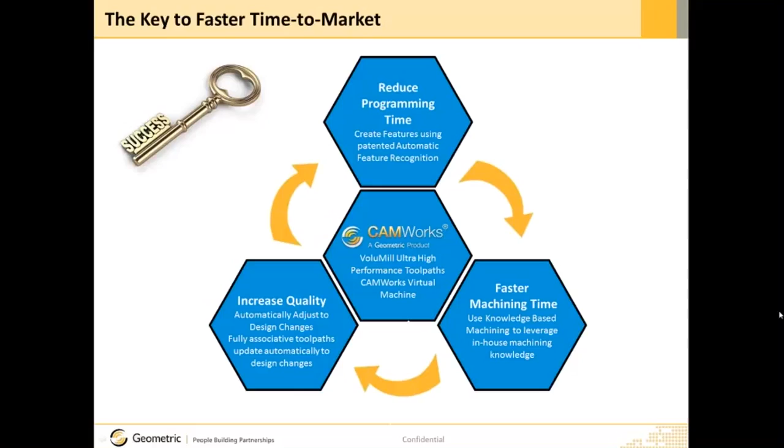So I'm often asked why CamWorks, what's so great about CamWorks? The first thing is that you can reduce your programming time by up to 90%. And you can have faster machining and cycle times by up to 80%. You can cut your setup times in half and improve the safety of your CNC machines. And improve the quality and consistency of the parts that are being manufactured. You can also use CamWorks to automate and customize your system.

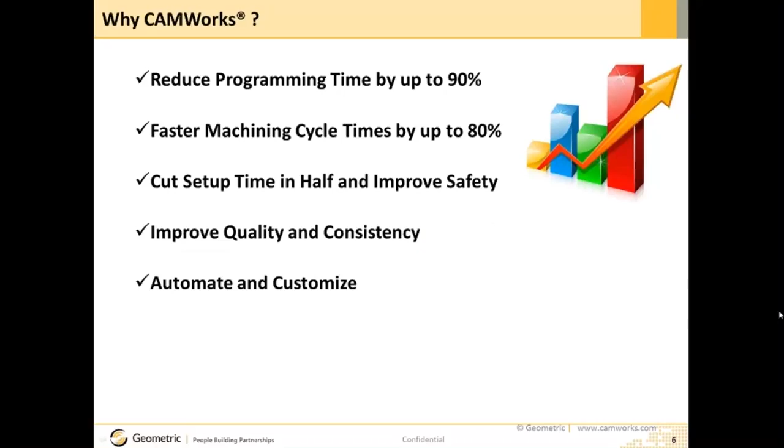So let's look at the first thing here: reduce programming time by up to 90%, and how CamWorks is able to do that. It uses feature-based machining, first of all, and feature-based machining is critical to reducing the programming time.

Similar to parametric feature-based mechanical design and what feature-based mechanical design did for design engineers, CamWorks feature-based machining does that for CNC programming.

It's seamlessly integrated, so it's right inside SolidWorks or Solid Edge and runs directly inside the interface. It's also CAD independent in that it can take even imported models and treat them exactly the same way as it would native SolidWorks or Solid Edge files.

It uses automatic feature recognition to automatically recognize machinable features on the part. And it uses knowledge-based machining in order to generate operations automatically and choose the correct feeds and speeds, cycles, depth of cuts, and so on for the machining.

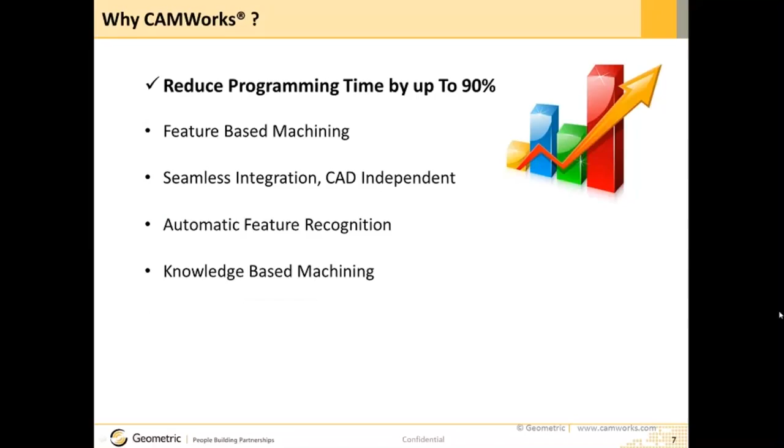Feature-based machining is important because it creates true 3D machinable features, not chains or profiles the way traditional CAM systems work.

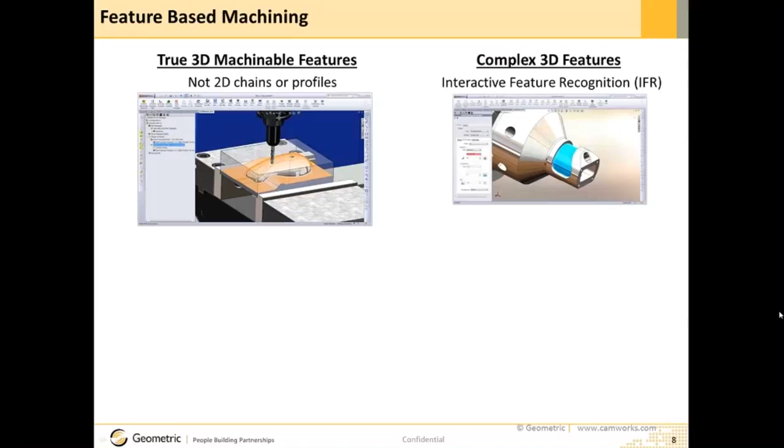And you can also create complex 3D features, wrapped features like the ones you see there, but also 3D or 3-axis surfaces, faces, and so on. CamWorks uses a feature tree, very similar to SolidWorks or other CAD systems.

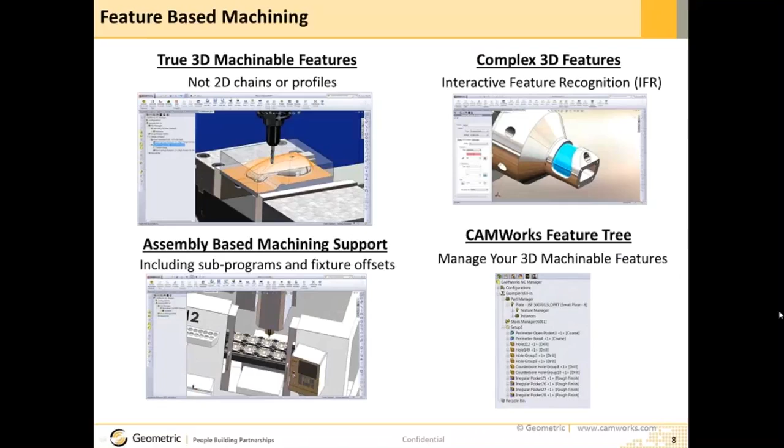It also has assembly-based machining support, so you can create a full assembly of multiple part fixtures, and you can check for collision avoidance and so on using CamWorks assembly-based machining.

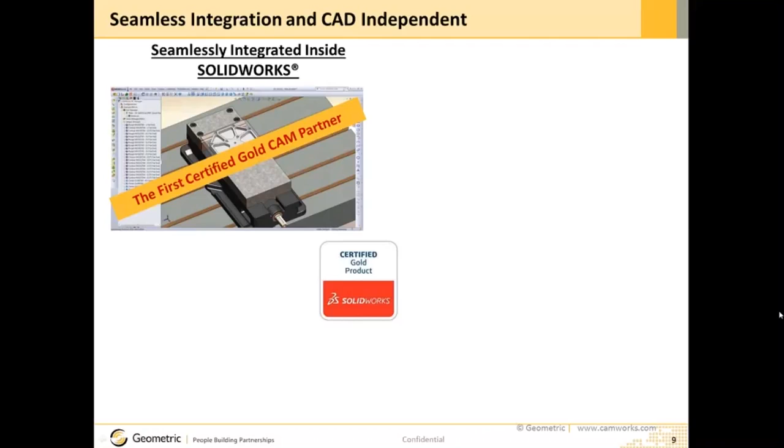It's seamlessly integrated inside the CAD system, running right inside SolidWorks, and all of the CAM data developed from using CamWorks is stored directly in the SolidWorks part or assembly file. CAMWorks was the first certified gold CAM partner of SOLIDWORKS.

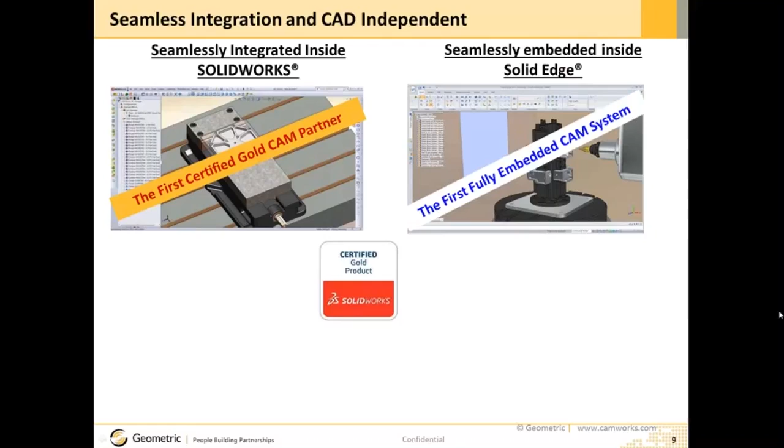Similarly, it's seamlessly embedded inside Solid Edge. CAMWorks was the first fully embedded CAM system inside Solid Edge, so you can program your parts directly inside Solid Edge without ever having to leave the Solid Edge environment.

I mentioned that it's also CAD independent, so it can take files from various CAD systems, and an imported file, whether inside SOLIDWORKS or Solid Edge, is treated exactly the same way by CAMWorks as a native file. It can take files from a number of other CAD systems as well, and it has industry standard support for STEP, ACIS, Parasolid files, and so on.

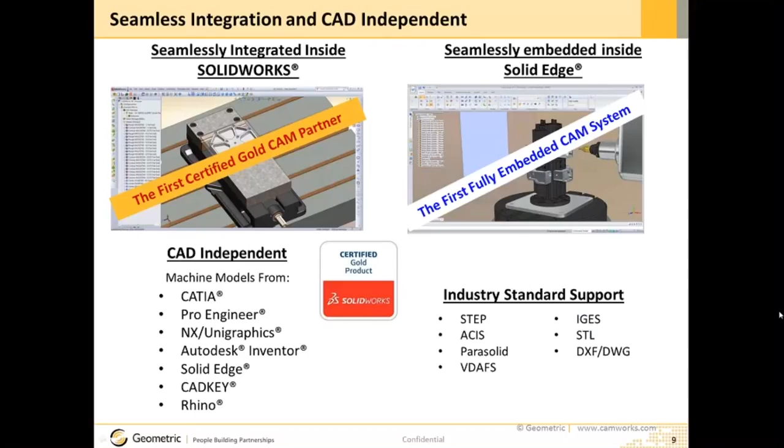CAMWorks uses automatic feature recognition. It's fully automatic, and it'll recognize over 20 different types of machinable features. This is much more robust than most feature recognition, not just for holes or pockets. It'll find slots, bosses, and a myriad of other machinable features on the part.

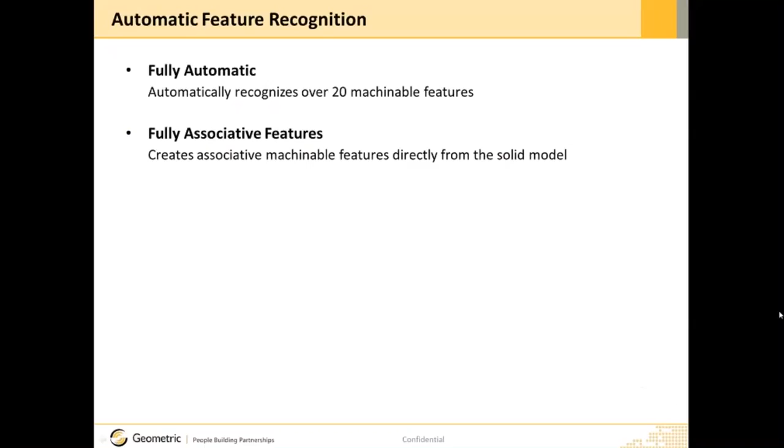It creates fully associative features, so these machinable features are fully associated with the model. It allows the design model and the manufacturing model to become one and the same, so the toolpaths will update automatically with changes made to the design file.

And it creates machinable features that are independent of the features used to create the CAD model. This is important because the features used to create the CAD model are not always the ones that need to be machined.

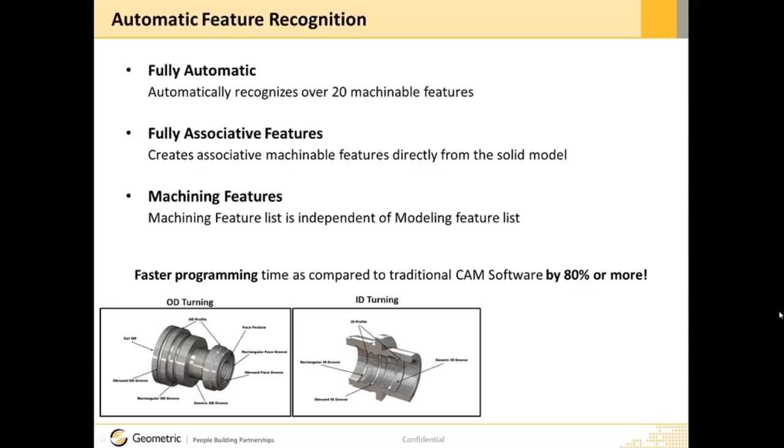And it ends up allowing you to have faster programming time as compared to traditional systems by 80% or more. You can see here it supports OD turning, ID turning, and CNC milling features as well, so it can find all the different types of features identified there.

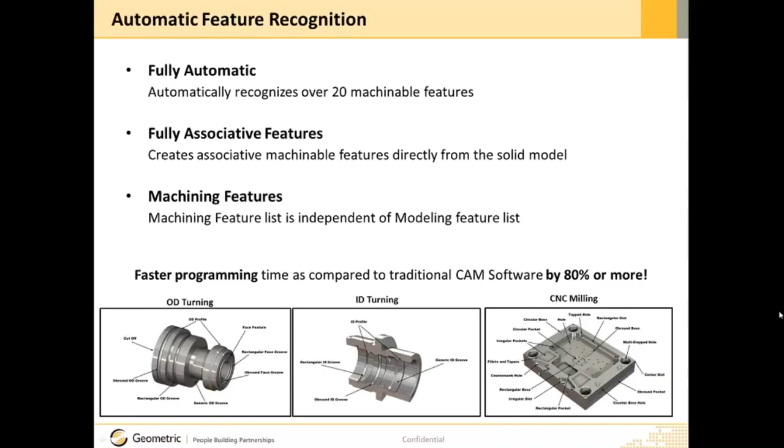CAMWorks also uses knowledge-based machining, and it uses the patented technology database in order to generate operations and create toolpaths.

Using the technology database, you can capture and reuse your best practices, which improves efficiency and plant-wide consistency. This means all the programs are going to be generated the same way for the different types of features being machined.

And it's fully customizable, so you can capture the best practices of your best programmers and machinists and store them inside the database, so those techniques, machining strategies, tools, and feeds and speeds are used automatically when CAMWorks sees a particular feature in a particular type of material.

And this eliminates repetition through standardization, so you do it once and you can use it again and again and again. This is the most advanced knowledge-based machining technology available. Inside the technology database, we can define machines, materials, feeds and speeds, tooling, and so on.

So let's now take a look at the product and how it works.

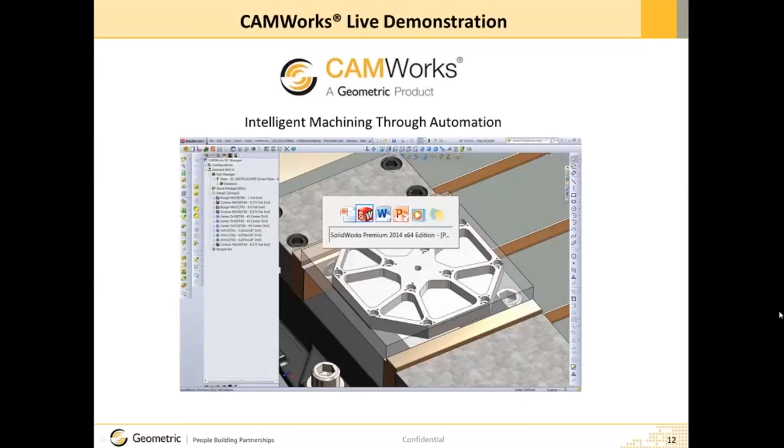So here's a part that I have inside SOLIDWORKS. This happens to be a native SOLIDWORKS file, and you can see the tree over here, the SOLIDWORKS feature tree. This could just as easily be an imported part as well.

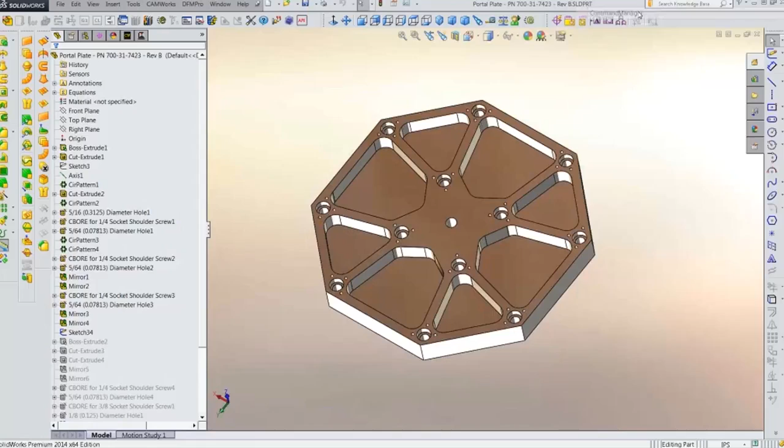CAMWorks is an add-in to SOLIDWORKS, so once it's been installed, we end up with a CAMWorks menu. We also have a CAMWorks toolbar that gets added, and in addition there's the CAMWorks command managers, a couple that we add to the interface. Those are great for when you're first learning and getting used to the system. We also add a couple of tabs to the SOLIDWORKS property manager: one for CAMWorks features and one for CAMWorks operations.

So I'm going to take this part and begin by using automatic feature recognition to automatically recognize the machinable features on this part.

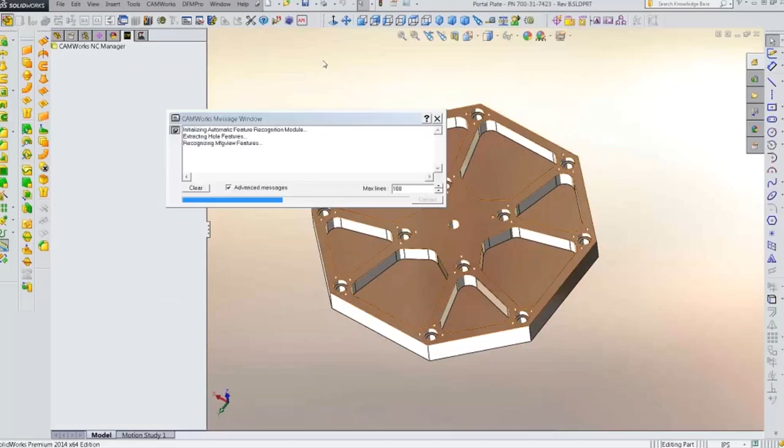And now the system is looking at the model and extracting the machinable features, identifying those features that can be machined on this part.

It automatically added them to the CAMWorks feature tree. So you can see here, it found the outside of the part perimeter. It also found the hole in the center here because it's a different size than the other holes in the part. It also found this group of small holes as well, and because all those holes are the same size, it automatically grouped them together so that I don't have to individually go around and pick all these holes.

Likewise, it also created a group of these counterbore holes. And you can also see here that it identified the pockets in the part as well.

Now that it's identified the features in the part, the machinable features, I can go ahead and use knowledge-based machining to generate the operation plan for machining these features automatically. So I'll go ahead and do that.

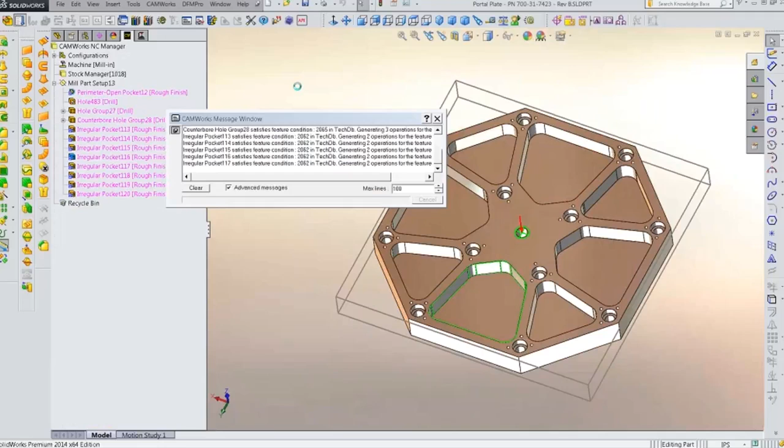And now it's using the technology database to choose the operations, tools, feeds and speeds, and so on for machining of this part. These are feeds and speeds, strategies, and tools that I've stored previously into the technology database. It comes with a standard set of tools and strategies assigned, but I've also customized it a little bit for my purposes, for my preferred method of machining.

And you can see here it automatically generated all these operations for machining of the part. Each of these operations is an individual operation for the machining.

And I can drag and drop these into a particular order. This is going to be processed from top to bottom, this list, and so that's the sequence of machining that's going to occur. Sequence of machining is always important.

So what I want to do here is sort these. For example, I could drag and drop these into a particular order if I want them in an exact order, or I could also go ahead and sort them.

So what I'll do in this case is use the sort operations function. I can use this list here to drag and drop the operations into the desired order. For example, what I might want to do is do all the rough milling and all the finish milling before all the center drilling and drilling.

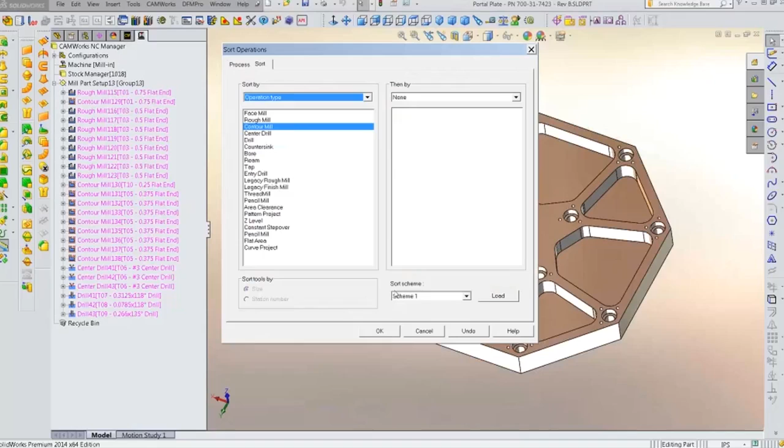I hit apply here, and it'll sort the operations into that order, and it does that automatically. And I can save this scheme if I want to reuse it automatically as well.

Now that I have them in the correct order, I can go ahead and generate the toolpaths. And now I can go ahead and simulate the machining of this part.

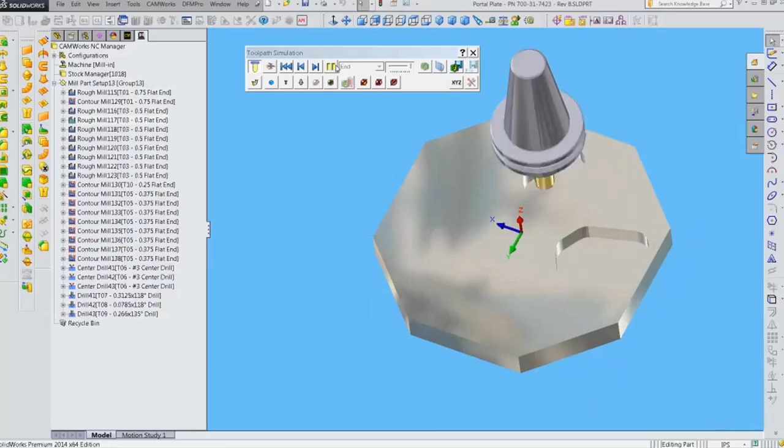And of course, I can stop this and single step through it. I can also change the speed of the simulation.

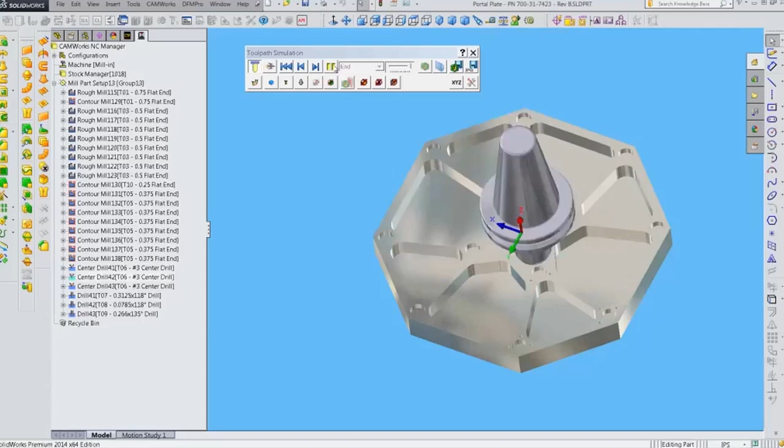And you can see the part fully machined.

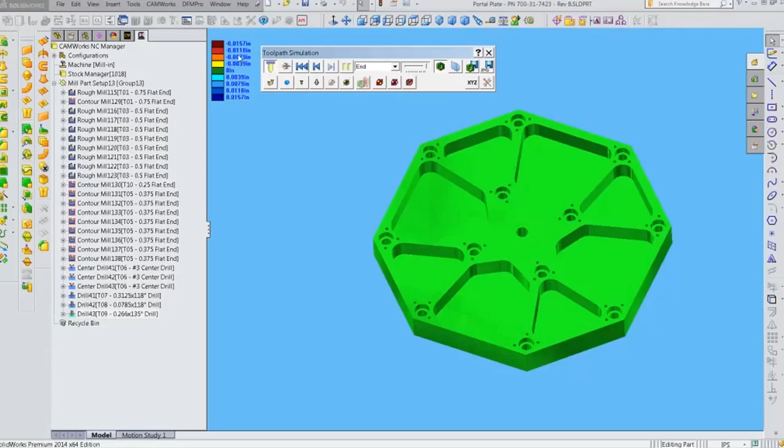I can also compare the cut model to the original design model, and I can see that everything is in green, and that's good. That means that everything has been correctly machined. If there was remaining stock, it would be in blue. If for some reason there was some instance that caused a gouge in the part, I would see it in red. But you can see where everything is in green and everything looks good.

You might wonder about the stock as well. You can see where I have it set up. It puts 100 thousandths around the part automatically for me, around a bounding box of the part. Maybe I want to hold this in a vise, for example, so I might want to add a little stock to the bottom of the part. I can do that here, just by clicking here. And you can see the stock size here that I would need to have in order to machine the part.

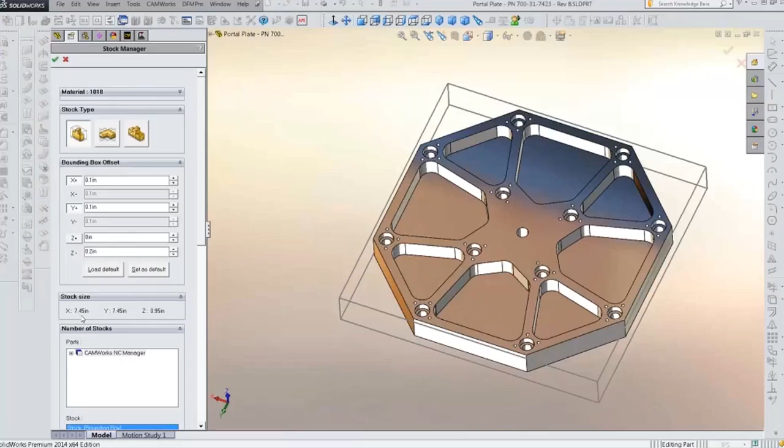Now that I've added a little bit of stock, let's watch the simulation one more time, and you can see that it'll leave a little stock on the bottom for me to grip on while I'm holding it in the vise.

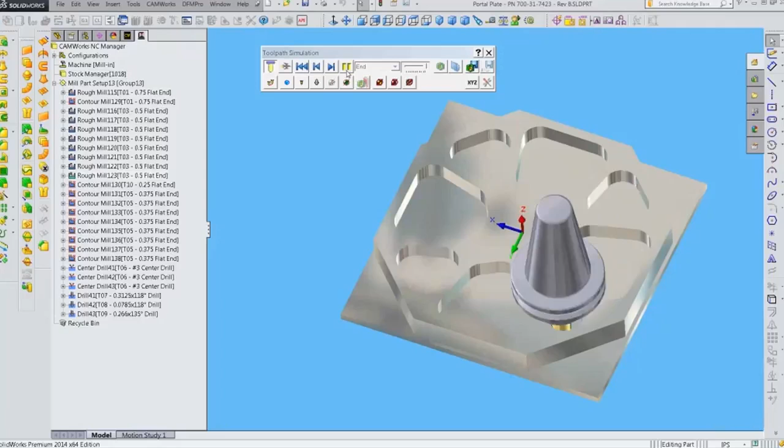So you can see it's very easy to use CAMWorks, and it's very quick to be able to machine parts. I can go ahead and generate G-code now for the machine that I like.

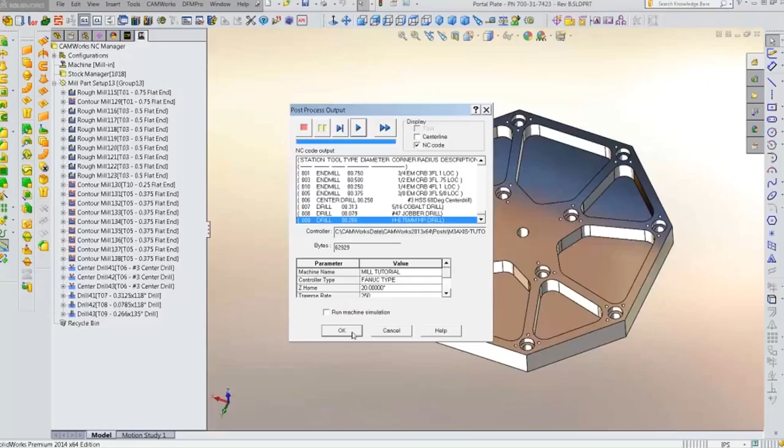And it asks me if I want to replace it. I can single step through the G-code, or I can just go ahead and play and let it generate the G-code file for the machining. And here's that G-code file that we could then send to the machine for the machining of this part.

I mentioned how the design and manufacturing model become one and the same. What I could also do is go ahead and pick this part and let's make a change to it. So for example, let's make a design change. I'll change this value right here to 4 inches, for example. And you'll see the part changed pretty dramatically in terms of the size of the pockets and so on.

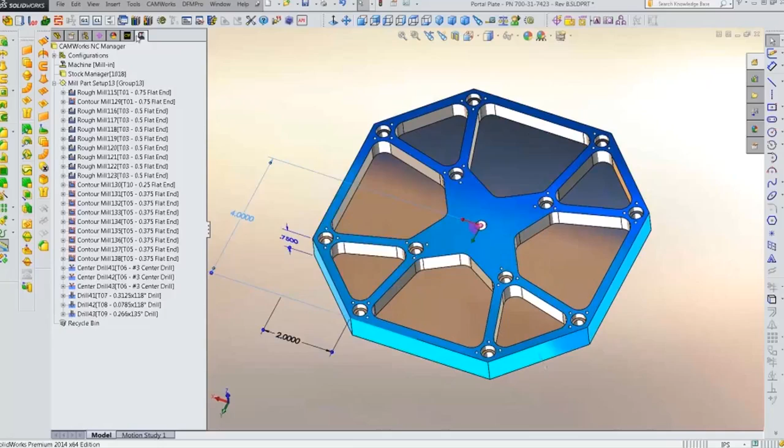As soon as I go back to either of the CAMWorks tabs, the system knows that it's been changed, and now it asks me if I want to rebuild it. In this case, I want to do a full rebuild because I've made a change that affects the toolpaths. The light rebuild is if I made a simple change that didn't affect the toolpaths.

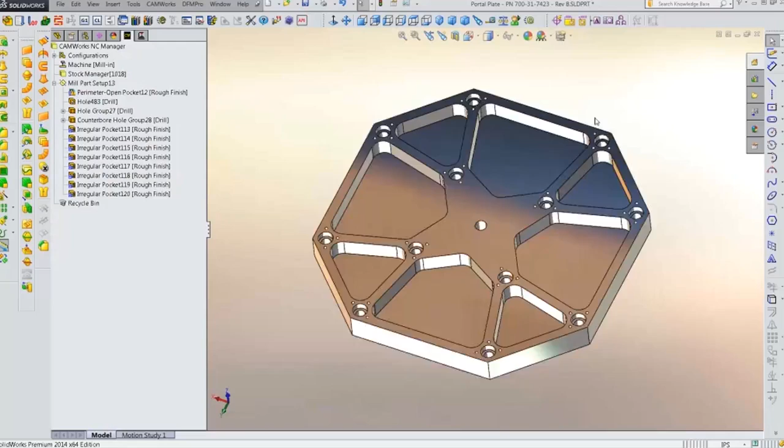And it goes ahead and generates the new toolpaths for the new change. Now I can go ahead and simulate, and now we'll get the new part machined with the changes made.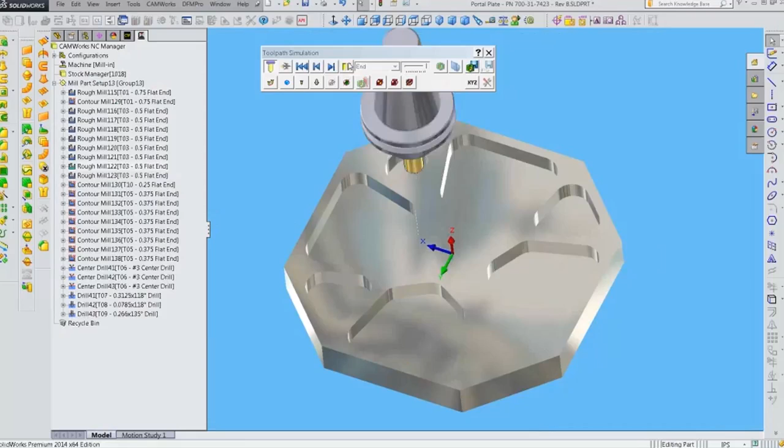And again, I could add stock to the bottom of the part if I needed to for machining or for work holding purposes.

Now this is a relatively simple part, but CamWorks can also be used to machine much more complex parts. I know Neil has machined much more complex parts.

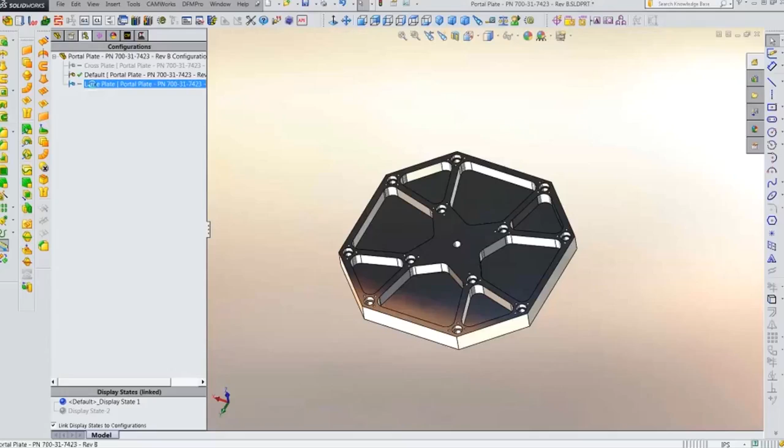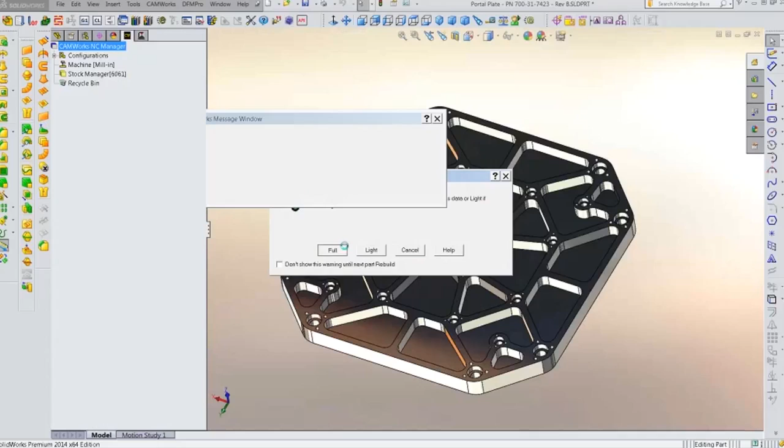Also, one of the things I might point out is that CamWorks also supports multiple configurations within CamWorks or within SolidWorks as well. So for example, if I have another SolidWorks configuration, and I have a larger, more complex plate here, I could also have a corresponding program, and in this case I do, for the larger plate as well. And all this is stored in the single SolidWorks part file. So you can even support multiple configurations from within the part file.

Okay, so let me go back now.

What I'd like to do is just introduce Neil and talk to Neil a little bit about NCAD and what CamWorks has done for him. So Neil, are you there?

Yeah, Neil, can you tell us about NCAD a little more and what type of CNC machines you have and what type of materials you're cutting?

We run all of our mills, our Haas mills, we also have a Haas lathe, as well as we run Thermwood routers. My mills vary from 12 by 16 all the way to 64 by 40.

We do primarily aluminum. We do some steel, some 4140, stainless, titanium. We pretty much do almost everything, but what work finds us is primarily 6061 aluminum, 7075, 7050, materials like that. We also cut nylon, Delrin, everything across the board. It's just job shop work, so we cut what comes in.

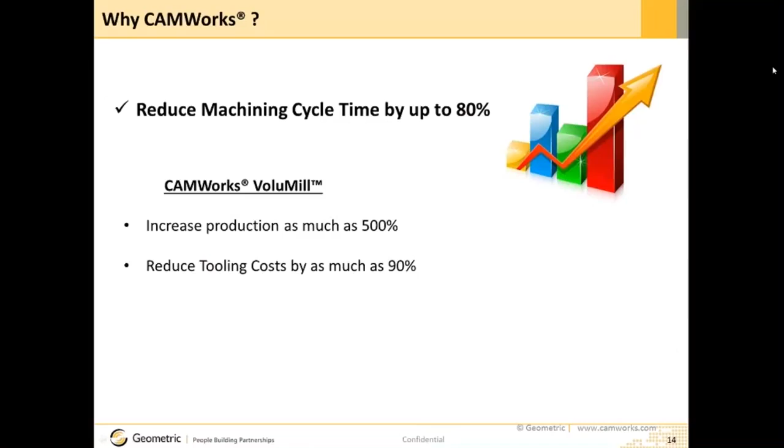And I mentioned about reducing cycle times, and Neil also made mention of the CamWorks VoluMill product. CamWorks VoluMill can increase production by as much as 500%. It can reduce tooling costs by as much as 90%. It avoids broken tools and the resulting crashes, and it significantly reduces your maintenance costs as well. It's easier on the machine, it's easier cutting, and it can remove material very fast. This is a tool primarily for rough milling purposes, and it'll also increase the life of your machine tool.

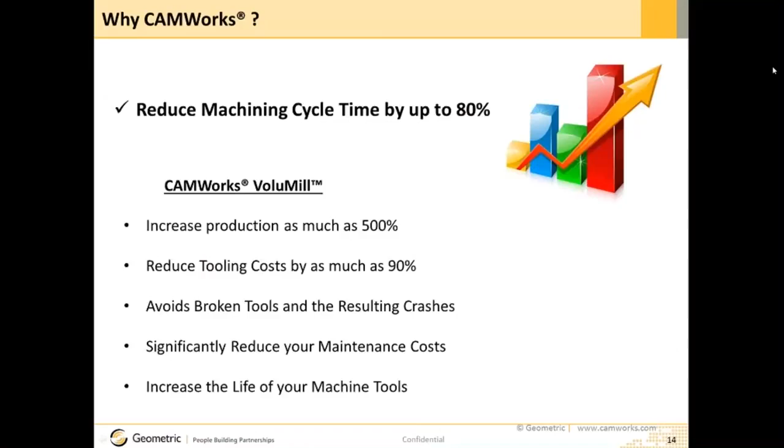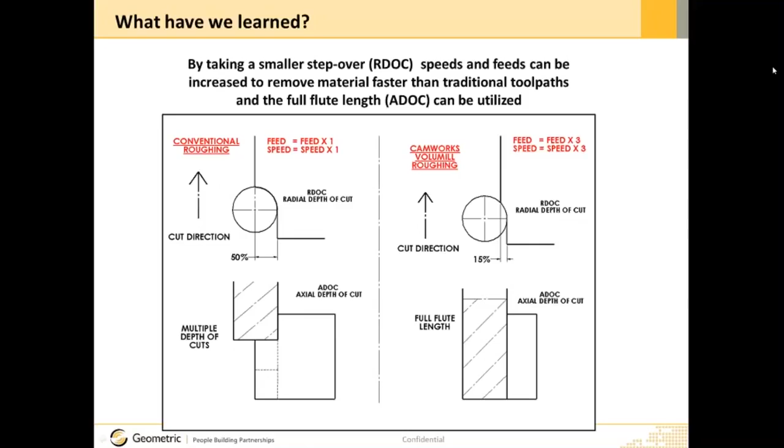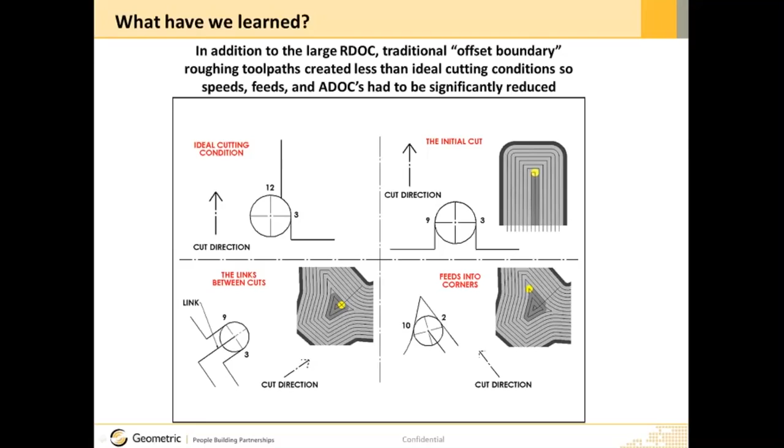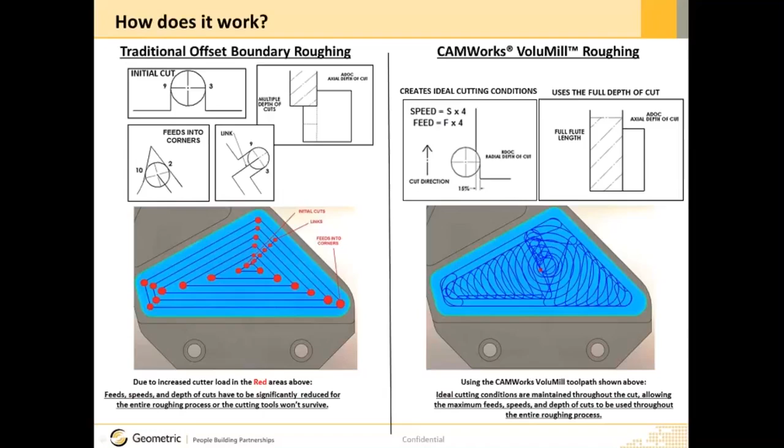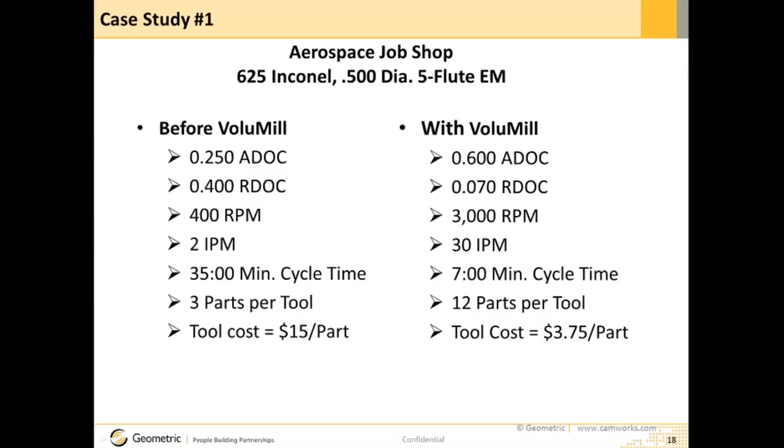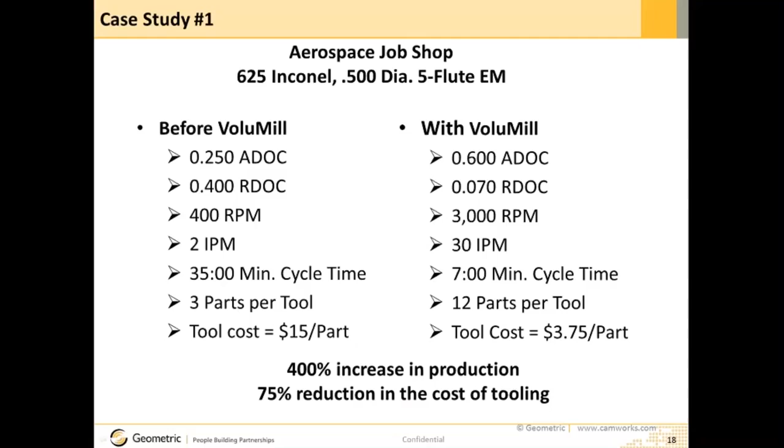So here's some results. Before VoluMill, they were cutting 625 Inconel with a 1/2 inch end mill at 2 inches per minute with a 35-minute cycle time. After VoluMill, they were able to speed up to 30 inches a minute and reduce the cycle time down to 7 minutes. Notice the deeper axial depth of cut and the smaller radial depth of cut in the second line. The bottom line was a 400% increase in production and a 75% reduction in tooling costs.

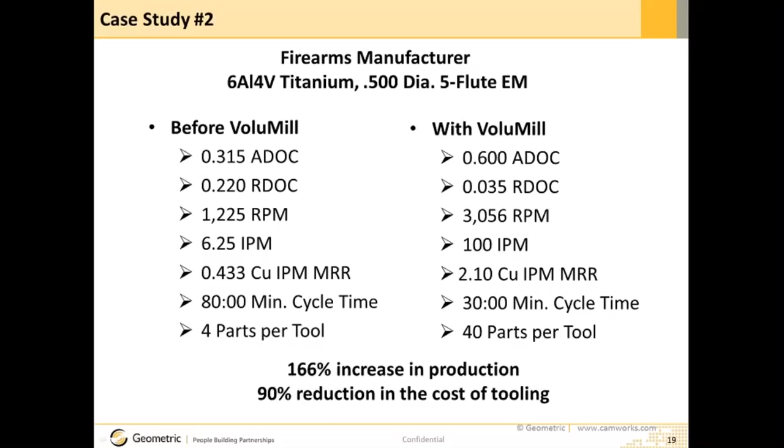This is likewise for titanium. Here's an example where they were previously cutting at 6 inches per minute with an 80-minute cycle time. They were able to cut at 100 inches a minute in titanium, ending up with a cycle time of 30 minutes. Notice the tool life also increased by 10 times as a result, because they're using the full flute length of the cutter and getting even wear throughout the cutter. That's a 166% increase in production and a 90% reduction in the cost of tooling.

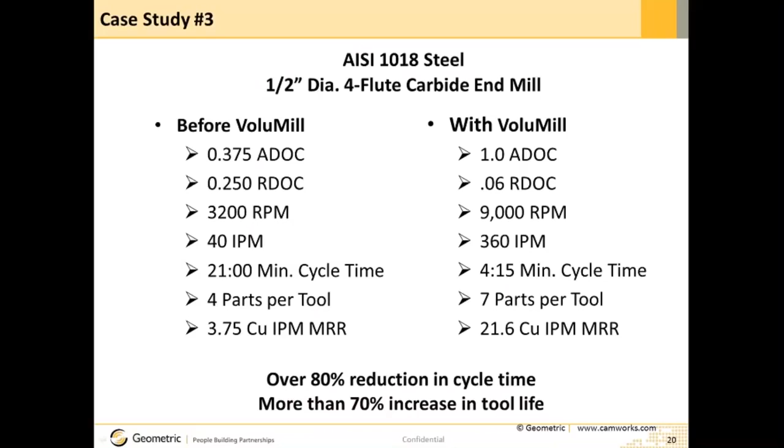Finally, here's an example in 1018 steel. I'll show you a video of this in a moment. Typically you cut 1018 at about 3,200 RPM, 40 inches a minute—this is what's recommended using a carbide 4-flute end mill, 1/2 inch end mill with a 1 inch flute length. Using VoluMill, we were able to up that to 9,000 RPM and 360 inches a minute. Notice how the cycle time was reduced from 21 minutes to 4 minutes—an 80% reduction in cycle time and a 70% increase in tool life.

Here's a video of that part actually being cut. You can see the smaller radial step over and the axial step over. This is 1018 steel being cut at 9,000 RPM, 360 inches a minute, 1 inch deep with a 4-flute 1/2 inch end mill.

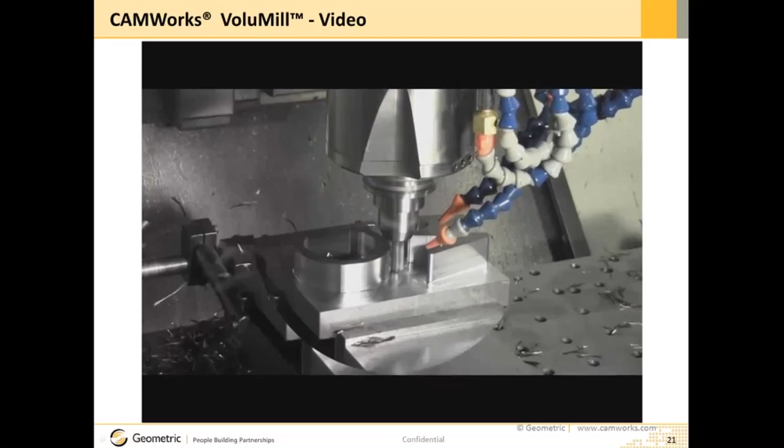It's pretty impressive. And I know, Neil, you use VoluMill quite a bit as well.

Finally, we can also reduce setup times, and we now have the new CAMWorks Virtual Machine. CAMWorks Virtual Machine is a true G-code virtual machine simulator. It has full collision detection for the machine and will show us the full kinematics of the machine, the fixtures, the tooling, the stock, and so on. The simulation is driven directly off the G-code. The result is that you can improve safety, avoid broken tools and collisions, and reduce your setup time with first-time-right programs.

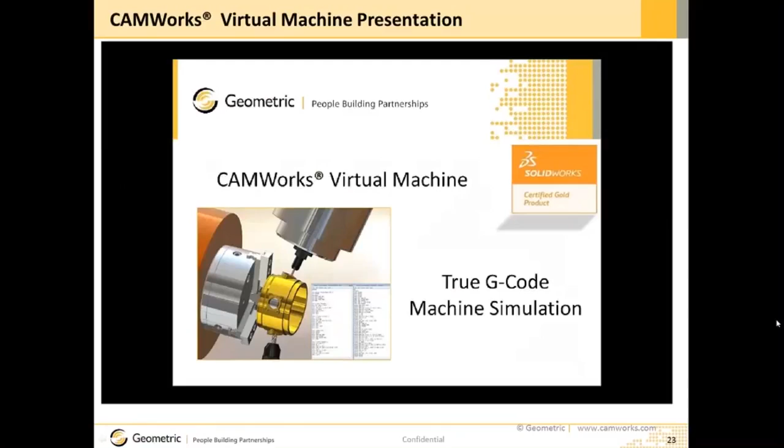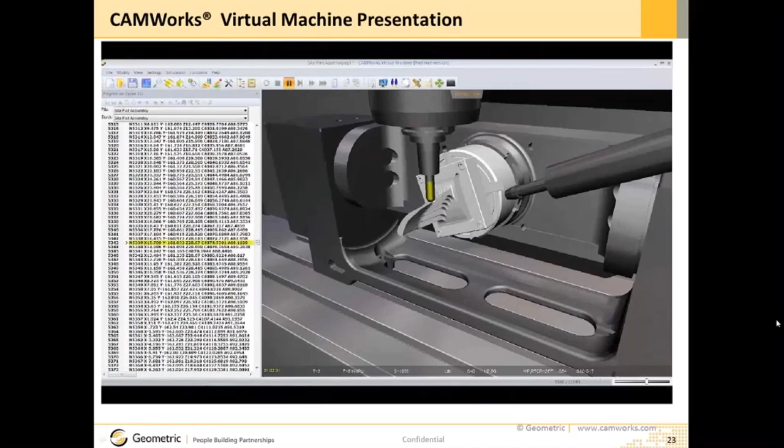Here's a short video on that. You can see here where there's a 5-axis part being machined in CAMWorks Virtual Machine. It also supports dual channels, so it'll support machining on dual turret lathes, Integrexes, mill turns, those sorts of machines.

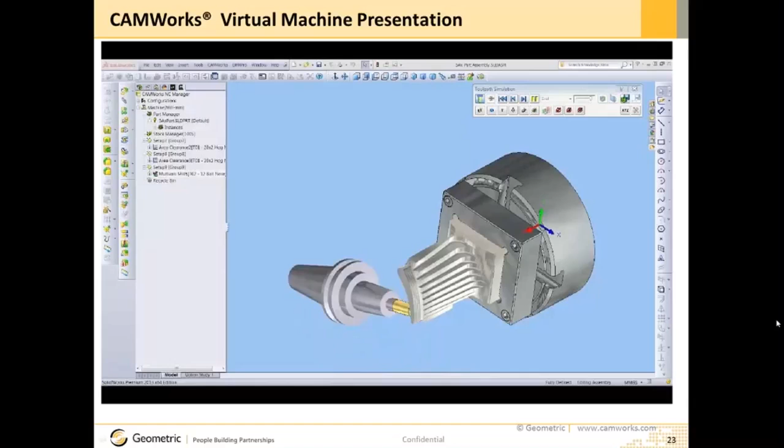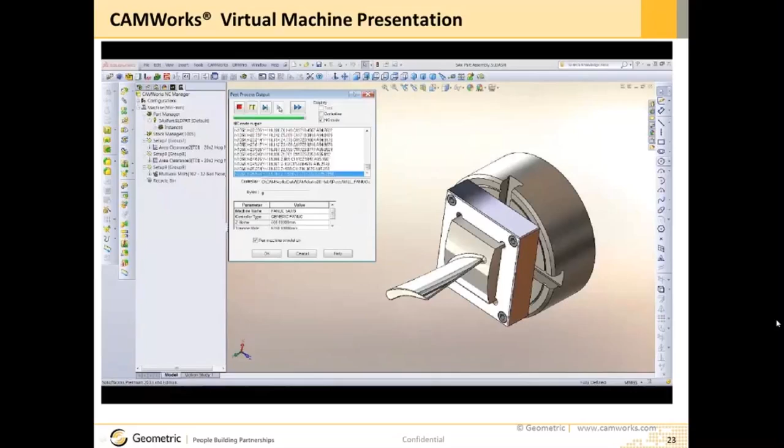You can see here where there's a 5-axis simulation of some 5-axis toolpath inside SolidWorks. Then we'll go ahead and launch CAMWorks Virtual Machine. In order to do that, it wants the G-code first, so we need to post-process the file, because the simulation is driven directly off the G-code. So here's the G-code file being generated, and then you'll see the machine simulation.

We're a little short on time, so I'm going to run by this now.

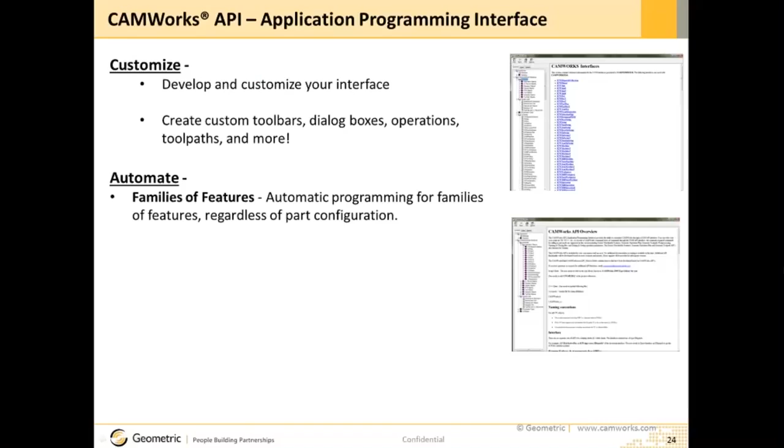Last but not least, what I wanted to mention was the CamWorks APIs that allow you to customize and automate as well. CamWorks also includes application programming interfaces that allow for interfacing and development.

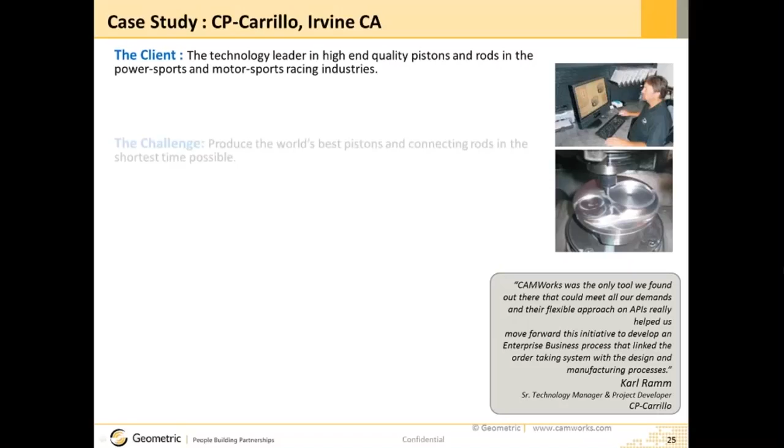Here's another quick example of a company called CP Carrillo on the West Coast. They make pistons and rods, and they used CamWorks and SolidWorks to reduce their design time by 95%, reduce their CNC programming time by 75%, and reduce the rework and scrap by 20%. Overall lead time was reduced by 85%.

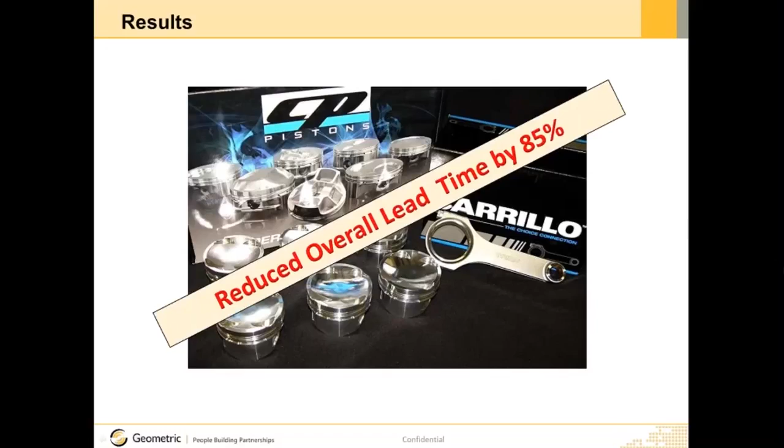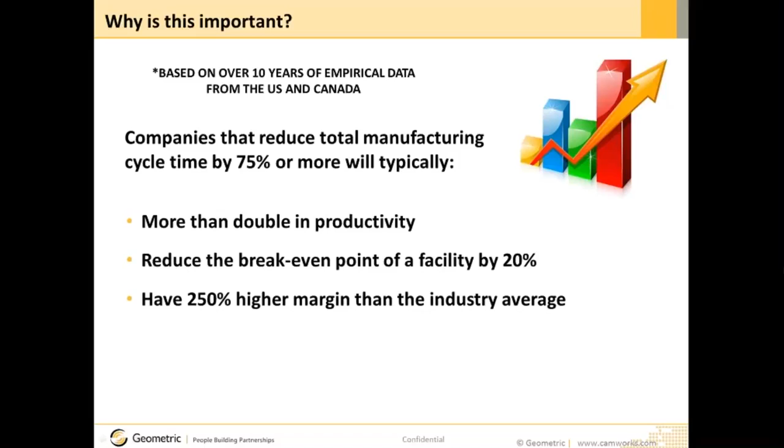This is important because based on 10 years of empirical data from the US and Canada, companies that reduce total manufacturing cycle time by 75% or more will typically more than double in productivity, reduce the break-even point of the facility by 20%, have a 250% higher margin than the industry average, and grow at a rate of 300% faster than the industry average. So don't you want to be one of these companies?

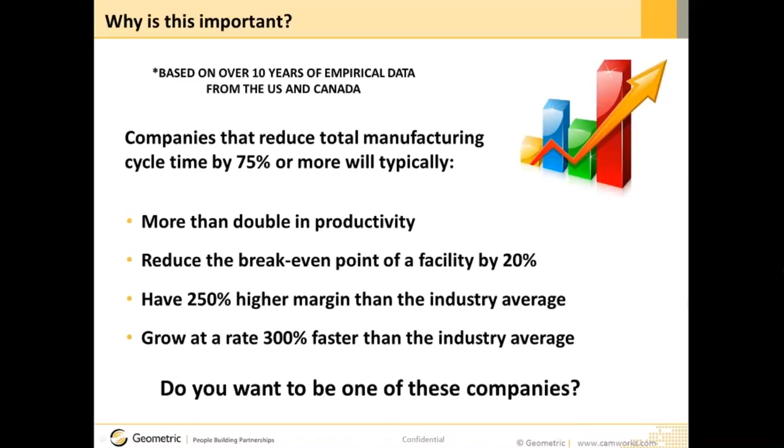One question that we're getting is, how hard is it to learn CamWorks? Are there any training videos available? There sure are. We have Solid Professor videos just like SolidWorks. So we have a whole set of those that are available, and they're available at no charge to the customers.

Another question that came through says, can CamWorks find all those features when the model is done in Pro-E Wildfire 4? Yes, in imported models, Pro-E Wildfire 4, we might need to save that model into a step file. For example, I know Pro-E Wildfire has a couple of different options, probably several, but by saving that into a file format that could be read into SolidWorks, then we can run it inside CamWorks, and yes, it'll find the machinable features exactly like you saw on an imported model as it will on a native SolidWorks or Solid Edge file.

Another question is, are the post processors customizable? Yes, they are customizable. We have what we call a UPG, which is a program used to customize the post. It's user-friendly, and it allows you to make changes to the post processors as well. So yes, they are, and as well, the resellers and Geometric also can help with post-development.